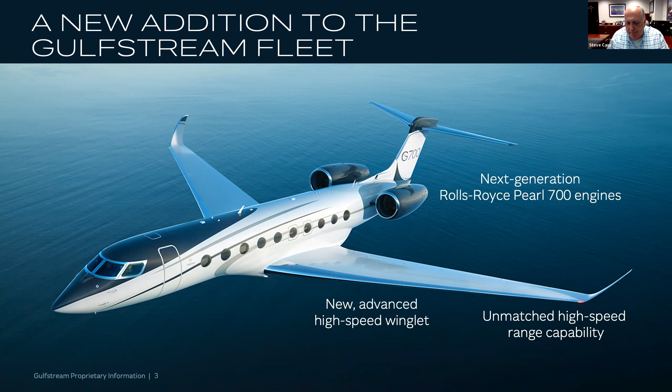From the wing itself, it starts off with the 650 wing, but we've done some changes to it, especially to the outboard part, where a new advanced high-speed winglet has allowed us to improve the aerodynamic efficiency. And then we combined it with some of the new technologies.

So we have the Symmetry flight deck that we first developed for the G500 and 600. One of the hallmarks of that Symmetry flight deck is the active control side sticks, a first for our industry. We'll be very well equipped, with dual HUDs and synthetic vision on the HUD. All standard. It will be a common pilot type rating with the G500 and 600. We also have a new data concentration network, which I'll explain later in the presentation.

For those that like numbers... oh yes. We've got a question, but we may want to hold it to the end. Rick Berkmeyer is asking, what is the status of the order book on this aircraft?

Well, we're selling into 2025, so that's probably what I can say. The first aircraft will deliver in 2022. If you talk to Sherman now, he would most likely pitch you a 2025 position. It's about 75 million thereabouts in 2022, escalating in further years.

For those that like numbers, here are the basic specifications for the aircraft. It's about 110 feet long, just under that. Wingspan about 103 feet, a little 3 feet wider than the straight 650ER. Tail height 25 ft 5 in, a little bit shorter than the 650, so you should be able to get into existing hangars.

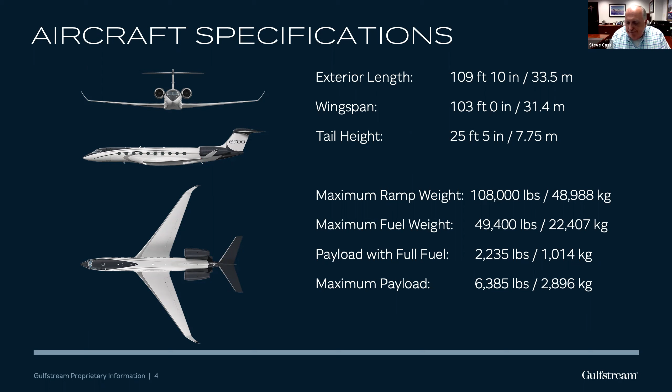All right, switching now, we're going to talk first about the cabin, and to give you a quick overview, I'm going to show a quick video of the interior of our G700.

I'd like to welcome you to the G700. My name is Timothy O'Hara. I'm the Director of Innovation Design for Gulfstream. We wanted to incorporate what luxury really was. The curves, function, all was really designed to go together. So this is the G700 seat.

In my 20 years of doing this, we've never spent as much time integrating the foam and design than we have in this seat. We allowed you to reshape some parts of the back panel to give you a wing or a slim design. We've also integrated this arm, fold-all waterfall that actually nests beautifully into the ledge. It's much more ergonomic than ever before. You have your soft glide, a footrest control. The seat also has a pan extender, so if you want a deeper seat, you can do that. And then the seat recline. Ledge control makes it very easy for the user to have quick functions.

So if you want to put windows up or down, turn your table light on, your reading light, it's a one-touch operation. We also have a new sliding lid for the aircraft, which houses cup holders, wireless power, which allows you to put your phone down without plugging in and charge your phone. But you also have the USBs, and your large open storage allows you to have a lot of flexibility. You also get a USB and an outlet.

Cup holders, and it still allows you to have a full-size table as well.

This is the brand new 6-place dining. We have a single pedestal table which can raise up. A leaf comes out of the table. Within 20 seconds, you're set up to have a full 6-place dining. In the table, if you lay your phone down here, the phone will be able to charge.

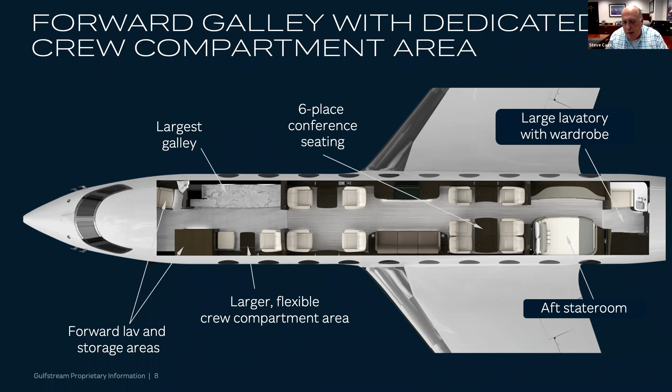We also have an extended configuration, with an extended aft lavatory and actually a master suite. In this configuration, if you do not need to have the crew rest area, what we can do is give that space back to the passengers.

So in this configuration, you still have the same forward lavatory, but the galley becomes a double-sided galley instead of a single-sided galley. It's actually a little bit larger than the galley that's on the 650.

So lots of flexibility in how we can configure that aft area, whether you want a shower or not, or if you want the extended suite. We can actually give you 5 distinct living areas in the airplane.

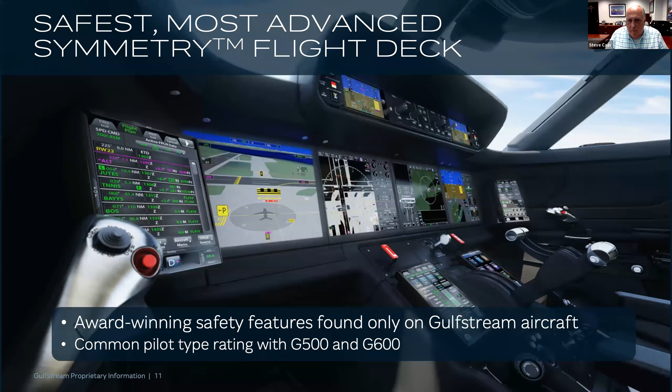So switching gears, we'll talk a little bit now about the Symmetry flight deck. This is really building upon what we have accomplished on the G500 and 600. One of the great things for the G700 is that this will be a common pilot type rating with the G500 and 600. There will be differences between the 700 and those aircraft, but it builds upon the touchscreen controls, the active control side sticks, and some of the 2D and 3D airport moving maps. I'll walk you through some of the various features.

We'll start first with the active control side stick. On a commercial aircraft or business aircraft, any aircraft today flying with a side stick other than the 500, 600 is using a passive control side stick. So what that means is that when one pilot's moving the side stick, the other side stick remains static, and you're relying on your displays to say who's flying the aircraft.

What's nice about the Symmetry flight deck is that these side sticks are electrically linked, so that when one side stick is being moved, the other moves along with it. There's always good communication between the pilot and co-pilot about who's flying the aircraft. Even when you're on autopilot, those sticks will move along with it, very much like what you see today if you were to have a yoke.

I love this quote here. This is from Chris Hart, who used to be the former chairman of the NTSB. He also spent about 14 years with the FAA and their safety directorate. He made the quote here about how the active control side sticks significantly enhance aircraft safety by improving that nonverbal communication and coordination between the pilot and co-pilot. First to bring this technology to the industry in the 500 and 600, and it will be on the G700 as well. Great safety feature.

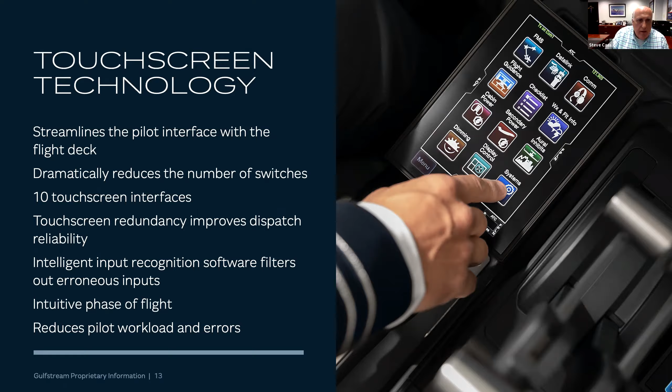In addition to the touchscreens and the active control side sticks, the aircraft also comes standard with dual head-up displays. Those head-up displays will be able to show not only our enhanced vision system, but also synthetic vision. So that is standard. As background, our EVS system—Gulfstream kind of led the way in the development of EVS back in the early 2000s. And we actually worked with the FAA to get those rules rewritten, and they were recently rewritten so that allows you to use the EVS system not only down below your normal decision height and down to 100 feet, but all the way down to touchdown and rollout. There's only a few aircraft that can do that, because you actually have to show a certain level of fidelity and capability with your forward-looking infrared sensor that's used for the EVS. Gulfstream is the first to have the EVS to land, and as far as I know, I think we're the only ones that have that certification for the EVS to land.

And then in addition to the synthetic vision, there are also some nice features that actually have a 2D and 3D airport moving map, which enhances your situational awareness in the terminal area. So lots of redundancy, lots of capability, really well thought out, again, by pilots, for pilots.

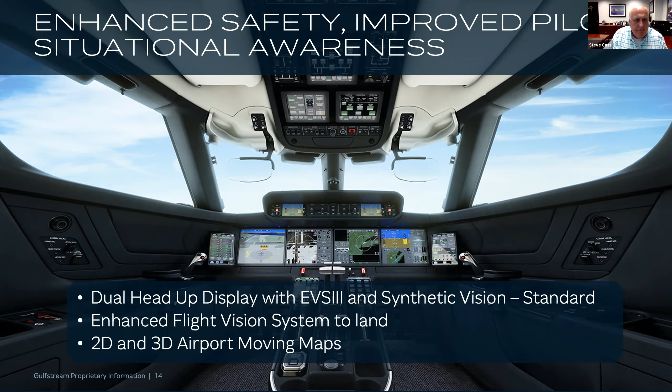And what's nice is if the system predicts that you're going to be overrunning the runway, it'll provide guidance to the flight crew to make sure you go to max auto braking, or check your landing distance. And if it can never find a solution to land safely, it will then tell you to do a go-around. So just a great safety feature. We actually won the AvWeek Laureate Award for safety last year for this.

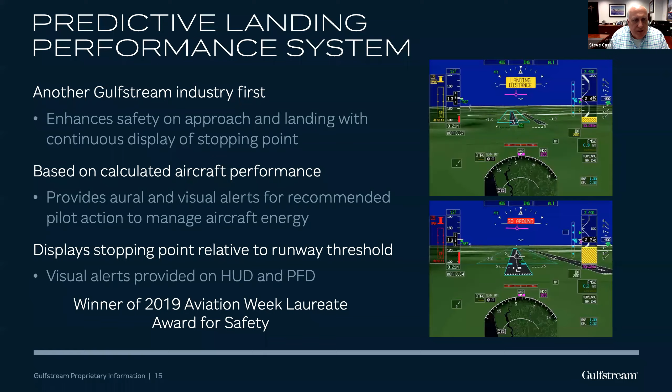Probably the easiest way to see how this works is to watch a short video. So what we'll be looking at here is actually one of our test flights.

We're deliberately going to go long on this to see the different triggers here. You can see the max and low—that's your maximum auto braking, and there's your low auto braking. So that's telling the pilot where you're predicted to land. I'm going to pause in just a second here. Now you can see how the runway turned amber, and you got an amber note on the left-hand side. And pretty soon we're going to see a note that says check auto brakes. There you are. So now shallow out again, 400. The reason why it's telling you to check auto brakes is if you look on the left-hand side here, at max auto braking you're landing safely, but with min auto braking you're not—you're overrunning the runway. So the system's telling the pilot, go to max auto brake in that situation. All right, I'm going to continue on here.

Again, we're going to deliberately go long, trying to max out before you get to 200. Okay, now what we're going to find out—we turned to amber here with a note of landing distance. Now you can look on the left-hand side here, you can see both the max auto braking and low auto braking—you are beyond the end of the runway. So that means you are too far, and we're going to continue on down.

Again, we're going to deliberately keep this going long. We're going to go all the way down to go around at 200 feet. That's right. Yep, so you just keep driving down. All right, and then at 200 feet—go around, go around, go to 20, left 20, please. Now you get the alarm to go around, and off you go. So really just a great feature throughout your entire approach and landing capability.

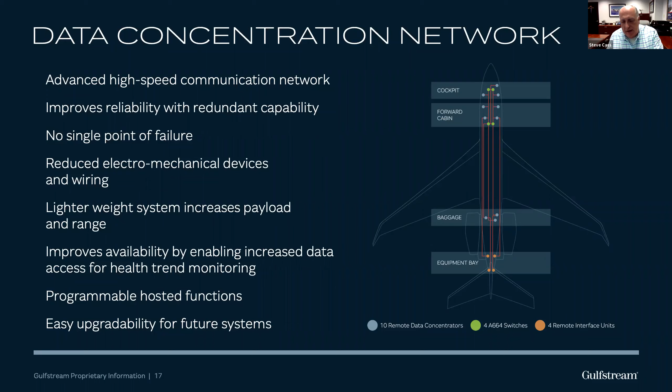All right, we'll switch gears now into the performance of the aircraft. 7,500 nautical miles at Mach 0.85, that's the long-range cruise speed. You're not going to want to fly slower than this—that truly is the long-range cruise speed for the aircraft. Slowing down is not going to get you any further. But most of the operators of the 650 are flying between Mach 0.84 to Mach 0.90, and you're really not seeing your fuel burn increase dramatically with those faster speeds. In fact, at Mach 0.90, you're flying 6,400 nautical miles.

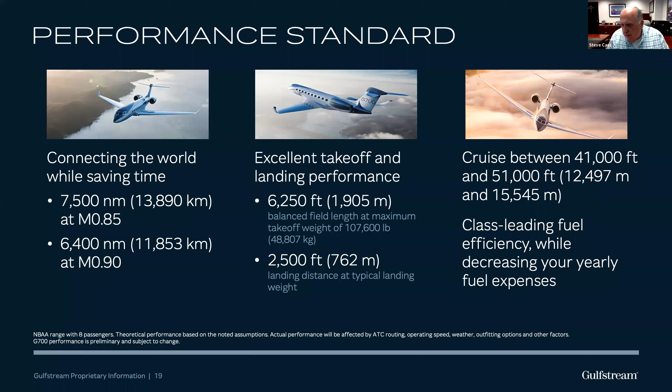Great takeoff and landing performance, about 6,200 feet at your maximum takeoff weight. Typical landing weight would be about 2,500 feet. Your cruise altitude will go directly to 41,000 feet and we'll top out at 51. Great fuel efficiency—we'll be about 3 to 15% more fuel efficient than the competition here.

And that's a great example of why folks are flying routinely at Mach 0.9. There's huge benefits of flying at those faster cruise speeds. When you think about the time savings, you're looking at up to an hour time savings flying at 0.9 versus Mach 0.85. You combine those savings over a typical year, and we're seeing operators saving more than 50 hours per year. So think about what that means, some of the other tangible benefits, in addition to just not being up in the air that long.

You're putting less hours on those aircraft, and that's going to enhance your resale value. Your maintenance programs, your parts programs, your engine programs, those are all based on hours. So if you're putting fewer hours on the aircraft, you're putting less money into those programs. And I think there's also a safety aspect too. If you're able to cut your crew duty day by an hour, you're just that much more refreshed when it comes time to land. So a lot of great features, and it's really, really well received for our 500, 600, and 650 operators that are flying routinely at Mach 0.9.

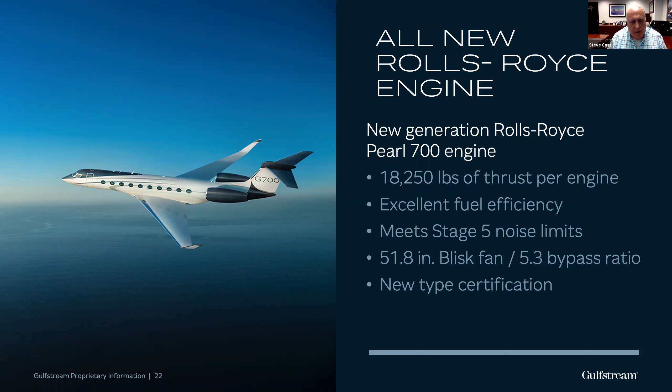And then you combine that with the new Rolls-Royce Pearl 700 engine, 18,000 pounds of thrust each, great fuel efficiency, about 3 to 5% more fuel efficient than the BR725 engine that's on the G650. Very environmentally efficient as well, will meet our Stage 5 noise limits. It's actually a blisk, a 52-inch diameter blisk fan. That's a bladed fan disc, that's what that stands for. A little bit higher bypass ratio. So it's an all-new engine, and again, doing very well in the flight test program.

I think it's important to add, Steve, the blisked fan on the Rolls-Royce Pearl - the shape of that fan blade is such on the Pearl 700, specifically for the G700, it's adopting a lot of the aerodynamic technology of your blended winglet. And so you've basically got 4 winglets on the airplane, 2 in the engine and 1 on each wing.

Yeah, well, you're exactly right, Jeremy. And if you look at the fan face of the 700 and the Pearl engine, it is very unique. The reason why it has to be that unique is so when we're flying close to the speed of sound, the things you have to worry about is developing shock waves on the end of your fan tips. And so that flow is so much more complex than even over your winglets, that the shape of those individual fan blades is quite unique. It makes it pretty spectacular to look at the fan face.

All right, we'll switch gears and talk about how we're doing in the program itself. I think you all know that we announced the aircraft back in October at NBAA. We had 1,000 of our friends and customers, and this was back before social distancing was even a concept. But it was a great night for Gulfstream, great night for the industry. But really the work went well before that announcement.

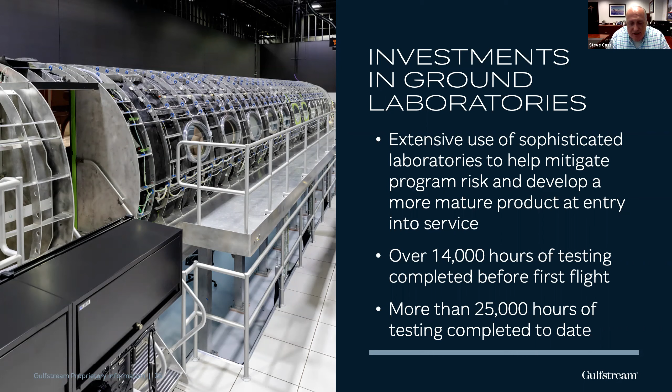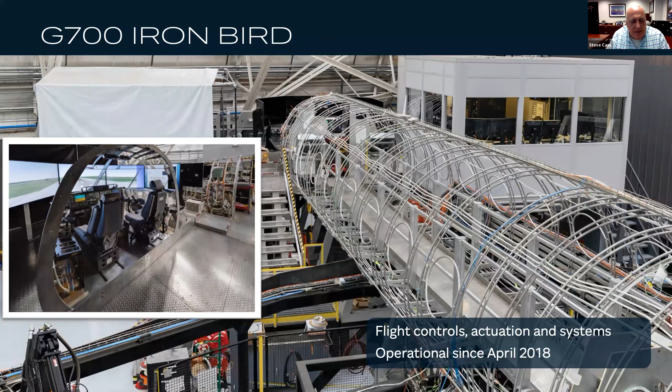One of the first labs to open up was our systems integration bench. This opened in 2016. This is where we're working to integrate the data concentration network and our avionics. We also combine that with a full iron bird, where we're testing out all of the flight controls, the actuations, and the systems. That's been in operation since April of 2018.

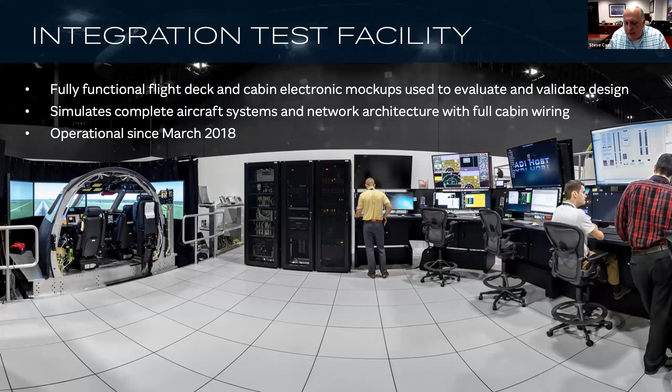The integration test facility, there's actually two ITFs. One is the flight deck and the other is the cabin. These are actually using aircraft components, so those are the actual part numbers, the actual wire runs, everything that's in the aircraft is replicated in these laboratories to make sure everything works together correctly. This has been in operation since March of 2018.

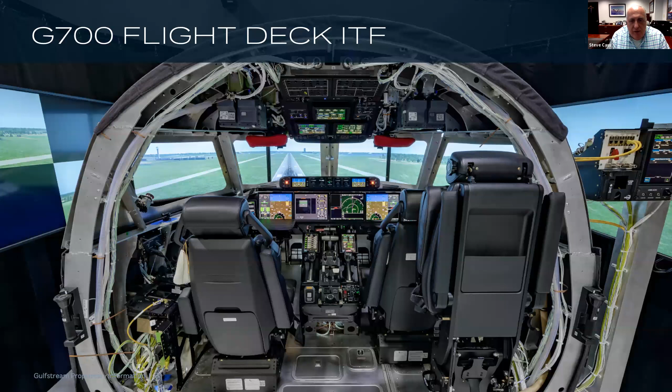There's a closer view of the flight deck. It does have some visuals there, so we can use it for some human factors testing as well. We actually were able to get some human factors testing certification efforts on the 500, 600. So instead of doing some of that work on the aircraft, we were able to do that with the FAA in these labs. Very high fidelity.

And then there's back in the cabin as well. This is not a customer area, this is really a working area. So don't pay too much attention to the seat designs, but it's really to make sure that the cabin management system works correctly, the lighting system we talked about. I mean, all those items are fully tested out in the lab.

We completed all of our structural testing. We actually did this on our second test aircraft that we built. We did not break the wing, and the reason why is because we'd already broken the wing on the 650. For those of you who've seen those dramatic videos in the past by other manufacturers actually taking the structural test to ultimate failure, you do learn quite a bit from that, but we didn't have to run those tests again. So we completed the structural test on the 700. We've now pulled that out, and we're going to be updating this airplane with a full interior. It'll be part of our cabin development testing.

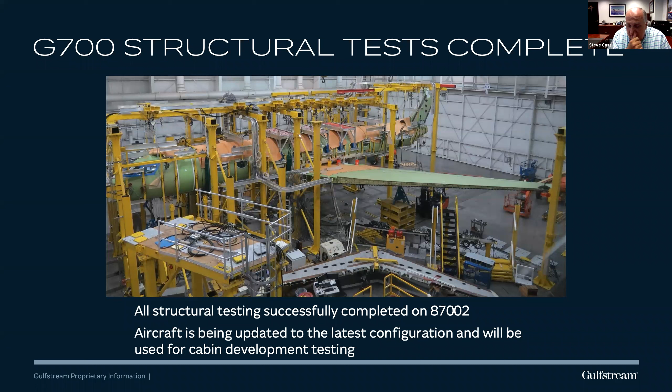And then our first flight occurred on February 14th this year. Just about 2.5 hours in the flight. We actually conducted it using sustainable aviation fuel.

I'll do a little side note here on Gulfstream's involvement with SAF. We've been using SAF now for 4 to 5 years, and have actually flown more than 1.2 million miles on SAF, really just to try to help demonstrate to the world and the industry that it is a safe fuel to use. It's a drop-in fuel, so there's no modifications needed to the aircraft. It's not like Jet A, it is Jet A. It meets the exact same certification standards as Jet A fuel, so it's safe and approved to be dropped into the airplane. You don't need to pull out your existing petroleum-based Jet A with the biofuel version. It's all Jet A, so there's nothing you really need to do there, but it really helps reduce your carbon footprint using SAF by about 50% on a life cycle basis. So we're going to continue growing the use of this and trying to make it a little easier for folks in the industry to get access to SAF and to help bring those costs down so you don't pay a premium for using it.

I'm going to show a quick video of the first flight of the G700.

Yeah, but very good. Pretty good.

So, great day for Gulfstream, and since that time we've had a lot of success in the flight test program. The second aircraft conducted its first flight back in March 20th, about a 3-hour flight, brought it up to Mach 0.85 and 45,000 feet. This is actually the fourth of our test airplanes. Our third airplane joined the flight test program back in May, again over about a 3-hour flight.

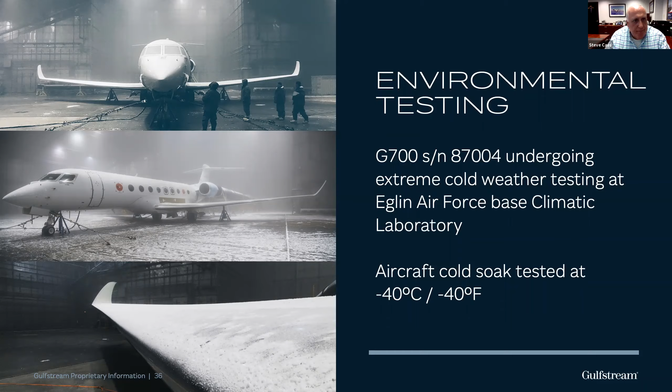Number 3 is really kind of a field performance type of aircraft. We'll be doing testing on the brakes, the engine, APU, climb performance, and field performance.

Number 4 is the aircraft that we had in the environmental control climatic chamber. We'll also be using it to test out various systems. When we first got up in the air back in March, it was still cool enough in North America that we were able to knock out some flight in known icing testing—so just some preliminary looks at the FIKI test.

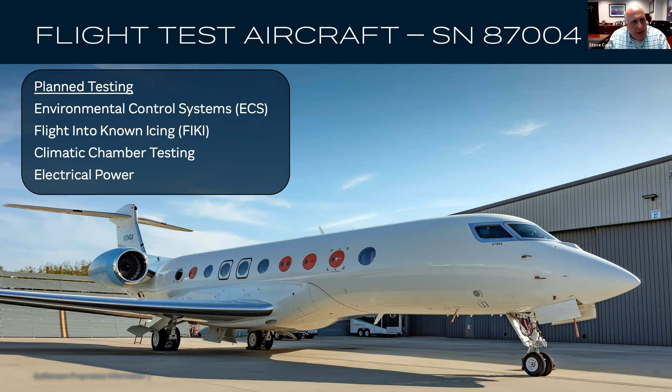In addition to those 3 airplanes, there are 2 additional flight test aircraft, number 5 and number 7, which will be flying later this year. Number 5 will do a lot of our work on avionics, DCN, flammable fluids, cold weather, HIRF and lightning, things such as that. Number 7 will be our avionics test bird.

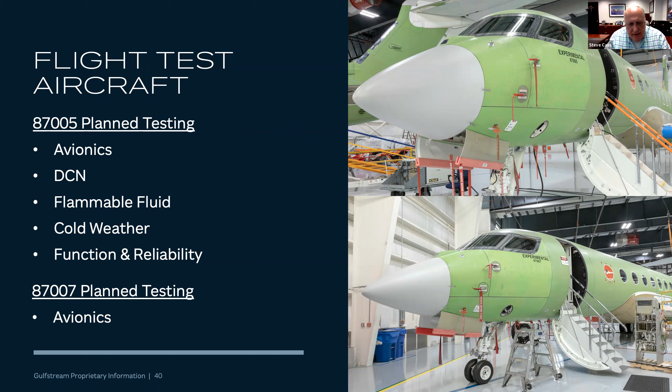And you may well ask, what about number 6 and number 2? Those are the 2 airplanes that are going to be outfitted with a full interior. This is more than we've ever had in the past—previously we maybe had just one, or relied solely on the labs. Now we have 2 aircraft that can be fully outfitted to make sure everything works correctly in flight, under load or cold soak conditions—making sure pocket doors work smoothly, doing acoustical testing to measure cabin sound levels and confirm our acoustic package meets expectations. This supplements the testing we're doing in our ground labs in the ITF, as we do our own development testing and also work toward getting our supplemental type certificates for the interior.

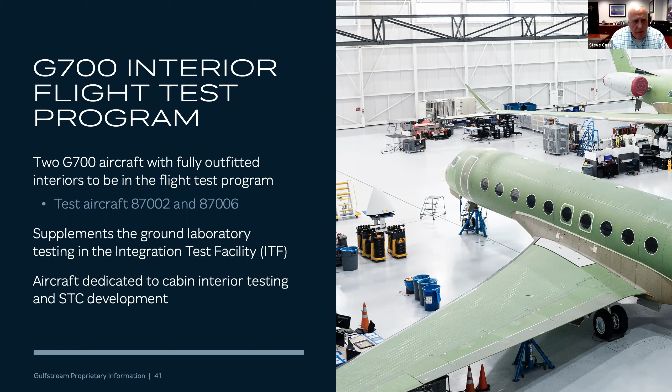So that really kind of wraps up the presentation, but hopefully I think we got across that we really took the best of the 650, which is the great long range and great high speed, and combined it with some of the great technologies we developed with the 500 and 600 with the Symmetry flight deck, and then wrapped that together with a lot of work in the interior of the cabin to make it more comfortable, more functional. It's a very mature development program. I like to think we did a lot of the heavy lifting on the G500, 600, 650 certification programs.

In addition, we have more than 400 G650s in service, and close to 70 of our G500 and 600s in service now. So a lot of in-service experience, combined with a lot of investment in laboratories, flight tests, and structural testing, really to make sure we deliver this aircraft on time and that it not only performs but exceeds what we're quoting. We're very conservative on how we quote our initial figures, and make sure it goes out of the box reliable and exceeding our customers' expectations.

So still on track for customer deliveries in 2022. It's hard to believe it's coming up so quickly. So with that, I'm happy to open up any questions anybody may have about the G700. I can help answer for you.